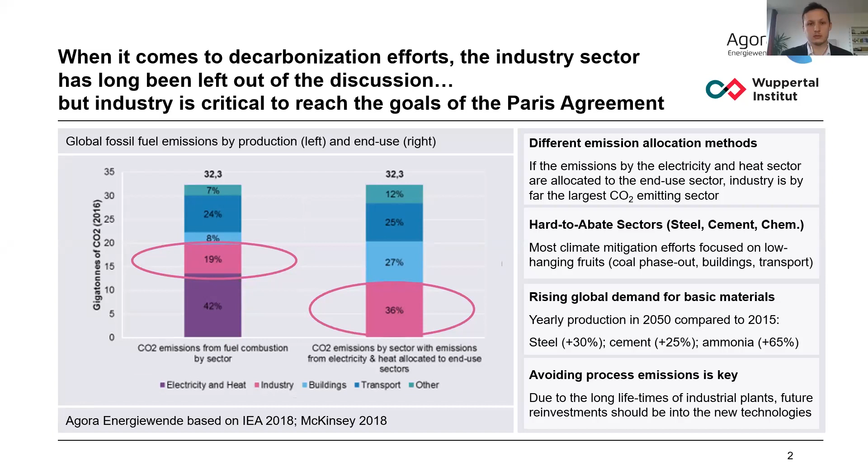Now, if you zoom into the industry sector, you can basically see that 3 sectors are responsible for the lion's share of emissions in the industry sector. That is steel, the purple part, iron and steel in the graph, then cement, which is the lion's share of other metals and minerals, and plastics and fertilizers, which is the chemical and petrochemical part in the graph on the

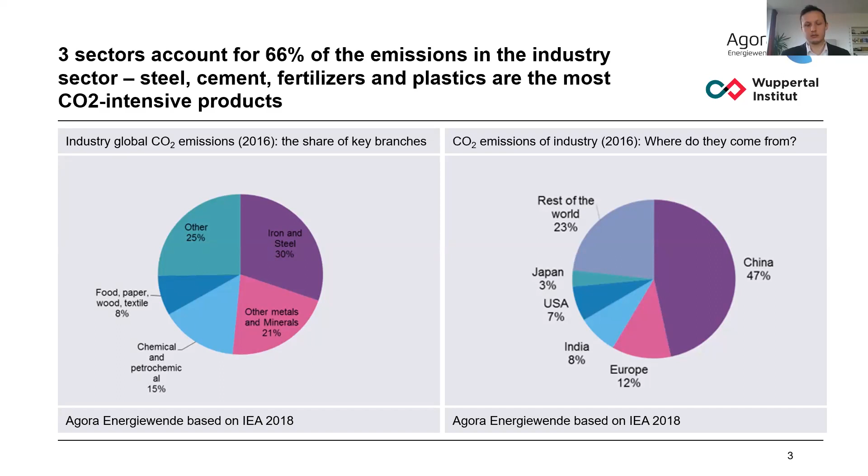left side. Then if we look at where most of the industry emissions are emitted, you can see on the right-hand side that China accounts for almost 50% of global industry emissions. Second is Europe, followed by India, the US, and Japan. This is the global overall picture. Now I go to the content of the study.

The study was focusing on Germany only, but I believe there are a number of takeaways that are also important and interesting for a European or even global audience. So in Germany, industry is responsible for about 1/5 of total emissions. You can see that on the left-hand side. And similarly to the global picture, around 60% of these emissions come from the sectors iron and steel, cement, and

basic chemicals. And we also decided to focus on these 3 sectors because they make up the highest share, but also all 3 of them account for a relatively high share of process-related emissions, which you see in the middle. Overall, around 1/3 of the emissions in the industry sector is process-related. And as I said before, we will need fundamentally new processes to get rid of these process emissions.

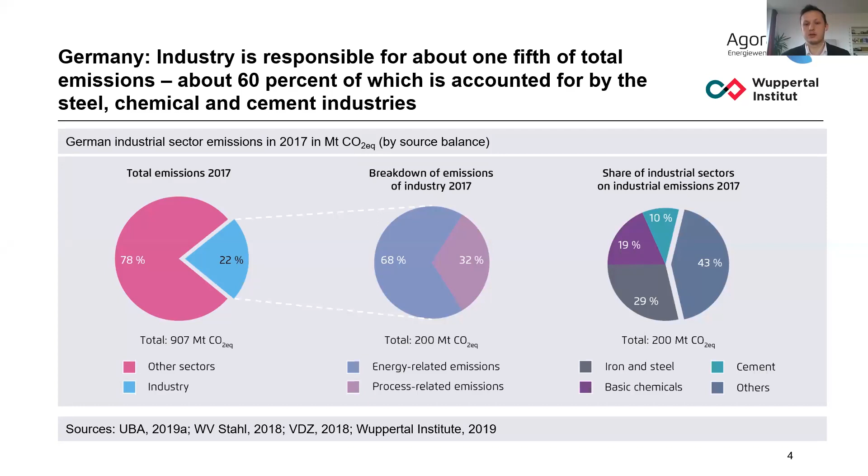Another interesting fact when it comes to industry decarbonization is that in Germany, industrial emissions remained rather constant since 2000 or 2010. And this shows us that despite energy efficiency measures, emissions have not been declining over the past years. Energy efficiency measures still remain important, but they were only able to compensate for parts of the production growth because we had stable economic growth over the past years in Germany.

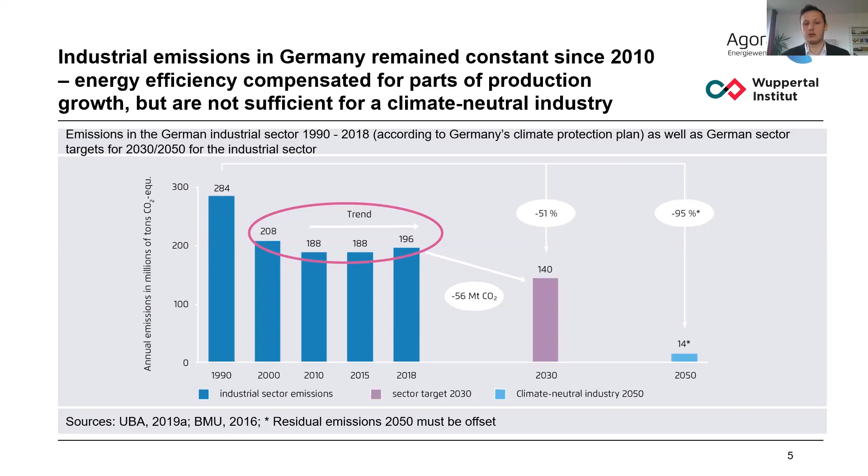And I think this is potentially also something that applies to a global scale, that energy efficiency can help to reduce emissions. But if we believe in continued economic growth in many regions of the world, energy efficiency is not sufficient for a climate neutral industry. And on the right-hand side of the graph, you can see the different sector targets for industry, the year 2030 and the year 2050, a climate neutral industry by then. So you see that trending sideways is not enough to reach these goals.

Now, what could be strategies and technologies then to enable a climate neutral industry? I mentioned already before that in order to avoid process emissions, we probably need fundamentally new processes. We identified 9 different strategies that in our view enable a climate neutral industry. And it's also possible to cluster them into 3 different groups. So one group is the cluster direct and indirect electrification. One way would be the direct use of green electricity. And another way would be the indirect use of green electricity through the production of green hydrogen.

The second cluster is resource efficiency and circular economy. Circular economy will play a vital part in decarbonizing industry because it has a major effect on the energy efficiency of producing goods. It has a major effect on the resource efficiency of producing goods. And probably without circular economy, it won't be possible to reach net zero by 2050. Then there are other options like material efficiency. So for example, using less material in order to get the same results, or material substitution. One example is building with wood instead of cement.

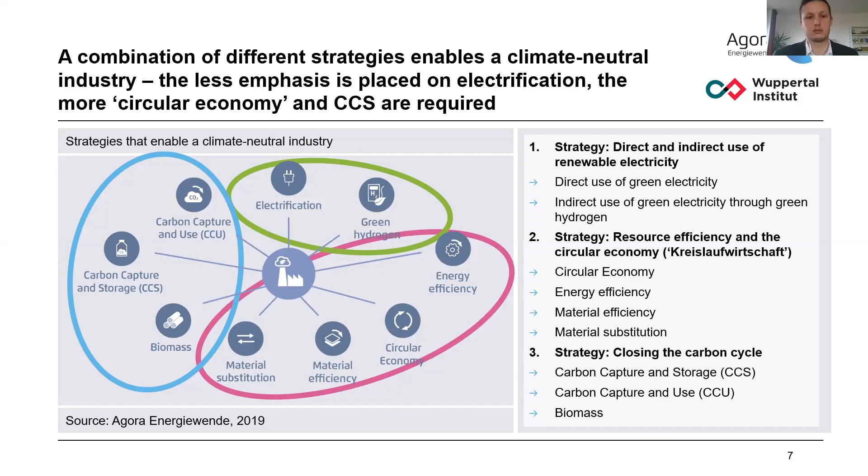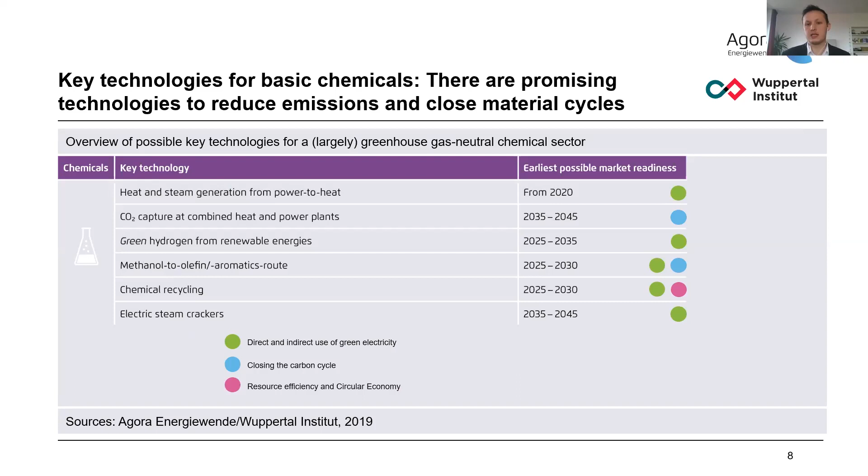What we then did in the study is to look at key technologies for the three main branches, so steel, cement, and basic chemicals. What you see here now are the key technologies for basic chemicals that we identified. And you can also see again that there are different technologies that can be allocated to the different strategies that I mentioned. I do not want to go into the details of the technology here, but you can see that it's also a portfolio of different options that we have. And another important thing is that most of these technologies are not market ready yet. That means that they're still in technology development, but they could become ready by 2025 to 2035, at least most of them.

For the steel sector and for the cement sector, we did the same thing. You can see the technologies that we identified. For steel, we think that hydrogen will play a central role, mainly because we think the direct reduction with hydrogen is a very promising technology that can deliver vast emission reductions in the steel sector. And for cement, from today's perspective, there's a role for alternative binders, which would lower process emissions or avoid them altogether. However, we think there will probably only be a small market share in the future. So for cement, because process emissions cannot be avoided, we also think that CCS technologies will play a vital role in the future.

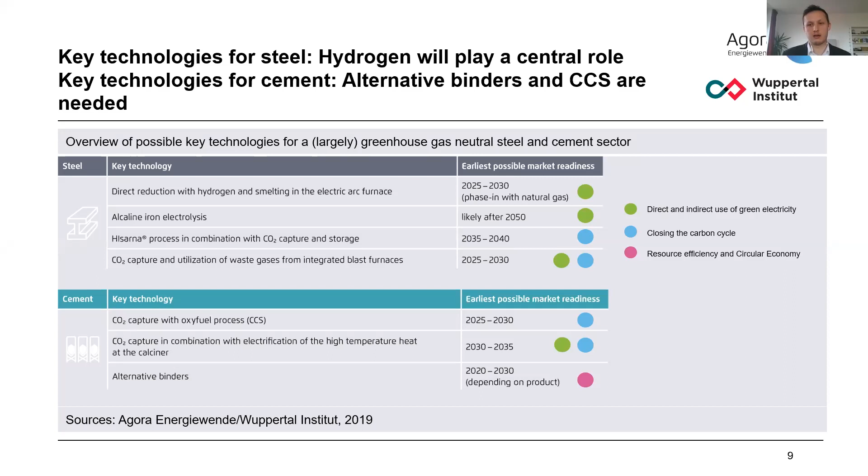For all these 13 technologies in the study, we developed brief technology fact sheets where most of the important information is summarized. You will see that once the study is available in English online. And this information included CO2 abatement costs of the technology, the CO2 abatement potential, the technology specific costs in comparison to the conventional technology, existing pilot projects where companies are working on developing these technologies, and reinvestment cycles and the technology readiness level of these technologies.

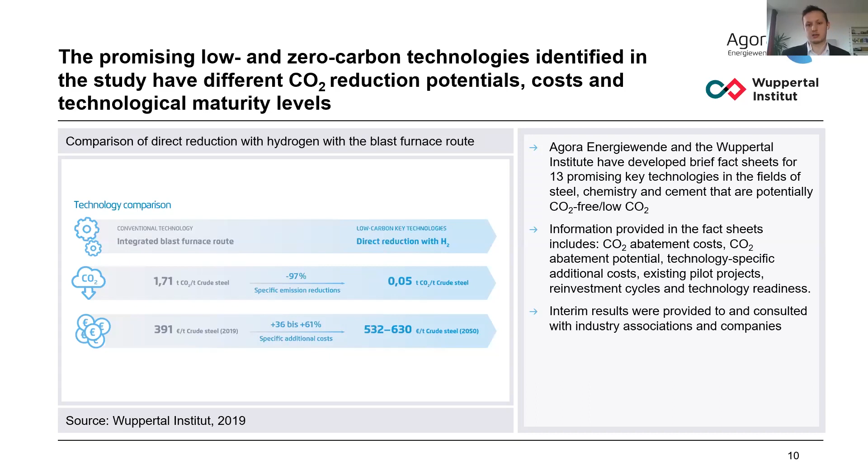So currently it's in a state where pilot plants are built. Soon demonstration plants could be built. And in a very optimistic case, we think that by 2025, this new technology could be ready for the market from a technical point of view. If there's not enough green hydrogen available, then it would also be possible in this case to start with natural gas.

And if you think the two of them together, it is very important that we do not miss the reinvestment cycle between 2025 and 2030 in the steel industry, because the alternatives to that would be not so good, I guess. One alternative is that companies decide to invest into the old conventional technology again, which would leave them in the system for a very long time.

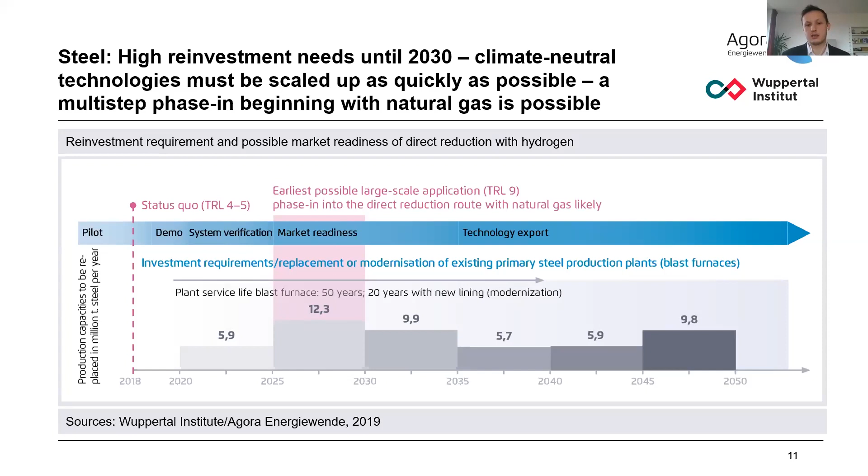And the other alternative is that if they don't see a business case to invest in the old technology, but also there's no business case for the new technology, then maybe they wouldn't invest at all, which from a German perspective or a European perspective might mean that this steel production moves abroad with potentially higher emissions than is currently the case in Germany and Europe.

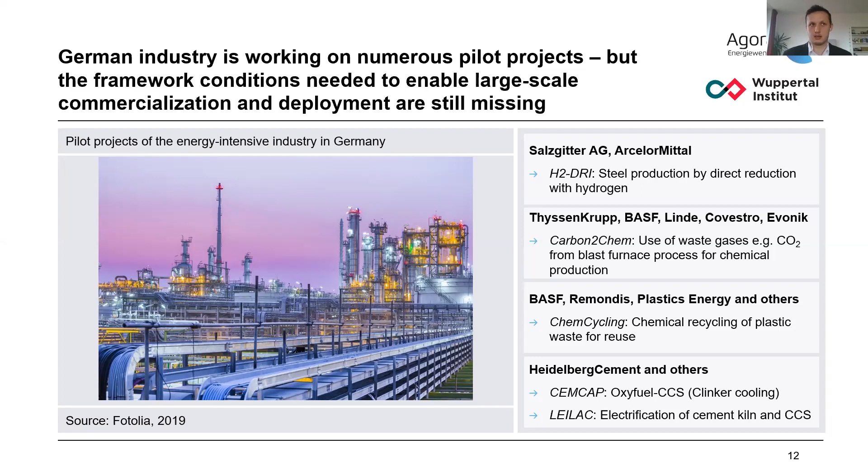This is a slide to wrap up the first part of the presentation on the strategies and technologies. German industry is working on numerous pilot projects, but I could also extend the case and say European industry is working on numerous pilot projects, because there's also a lot going on in Sweden, in the Netherlands, in Austria, in France. But what is missing is the right framework conditions to enable large-scale commercialization and the deployment of these technologies. And this will be part of the second part of the presentation. But before we jump into that, there will be another survey on the policy instruments before I start with that part of the presentation.

So I hand over to Nicola again. Yeah, I just needed to unmute me. Thanks, Vito. I will call upon the next poll, which you should be able to see right now.

The question is, what policy instruments do you think are suitable to create an investment framework for low carbon technologies? We have 4 possible answers. The first is high CO2 price with border carbon adjustment. The second one is policy mix scenario, for instance, carbon contracts for difference. The third one is other policy options. And the fourth one is no further policy support needed.

And I can see people are still voting. We are, by the way, we just hit the 200. So even though you only see us 4, you're not alone. We're 200 and more than 100 already voted. But it looks like almost everyone has made up his or her mind. So I will stop the poll and make it available for you.

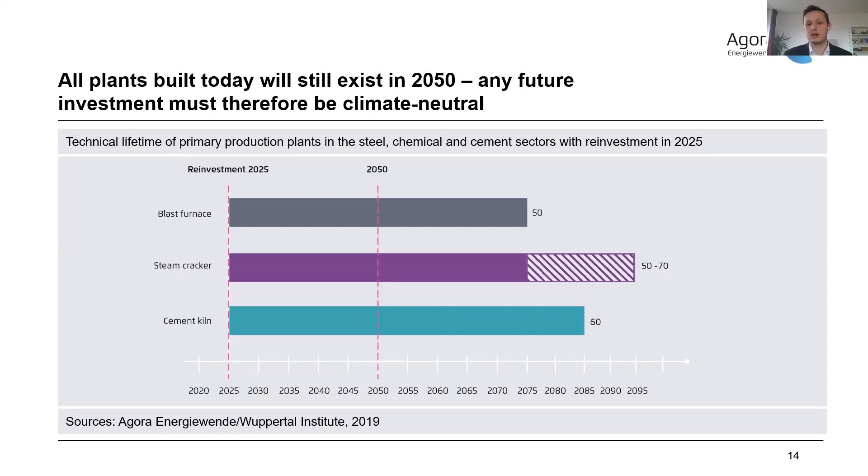That means any future investments from now on must be climate neutral, otherwise there's a risk of a carbon lock-in or stranded assets, that these plants have to be shut down before the year 2050.

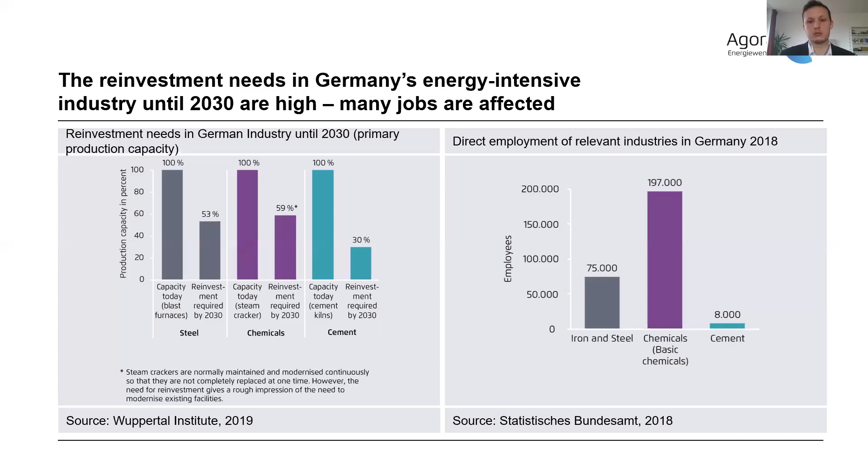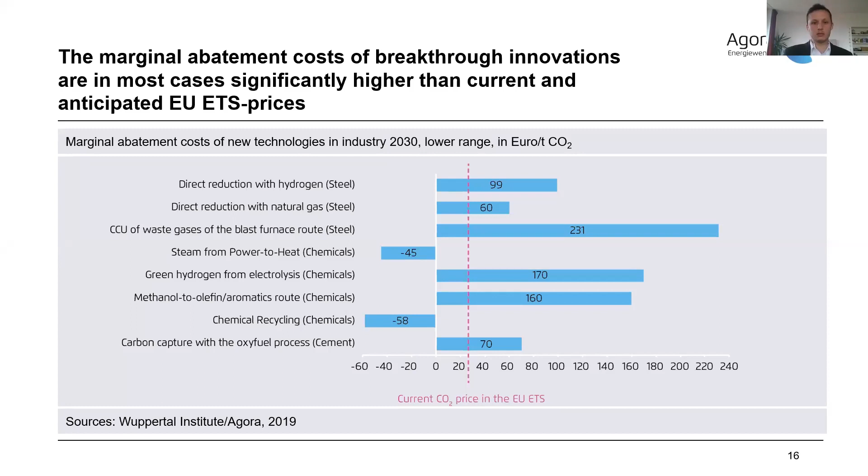And then there's the second option, policy mix. I do not want to go into the details of all of them, but just highlight a few. One is, for example, the carbon contract for difference that could cover the additional costs of specific technologies. We will go into the details of this one later.

Then there's the idea of securing sales markets for green products or feedstock. So either green hydrogen through a quota, or the quota for low carbon materials, and green public procurement, which probably most of you will have heard of as well. And another important set of policy instruments, circular economy standards, to make sure that circular economy really plays a vital role in our industry decarbonization efforts and in the industry transformation.

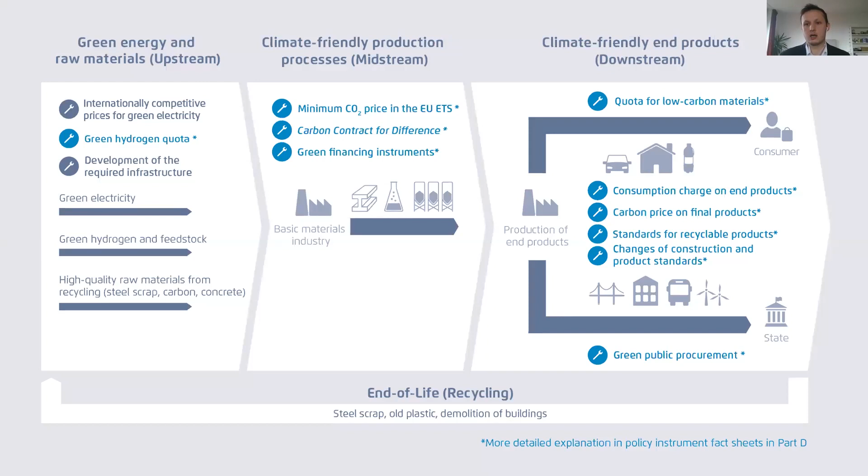If we look at option one again in a little bit more detail, we see that the high CO2 price with a border carbon adjustment is definitely an option. The idea is that there would be a high CO2 price in the European Union, and if basic materials are imported to the European Union from other countries that are not subject to a CO2 price or a lower CO2 price, they would have to pay carbon adjustment upon importing to the European Union. An open question is whether producers from the European Union that want to export to other countries could get an export or a border adjustment relief, because from a WTO law perspective, it is questionable whether this is feasible.

The biggest problems with these instruments we see from a political point of view, that it may fuel trade conflicts if the European Union was to say, we have a border carbon adjustment scheme based on climate reasons. Maybe other regions of the world, such as the US and China, will do that for other reasons, national security or whatever reason you can imagine. And there are also practical hurdles, that in order to define the CO2 content of different basic materials coming into the European Union, you would need tracking of the CO2 content, basically globally. And we also think that this is a very difficult administrative task, and there's also room for fraud.